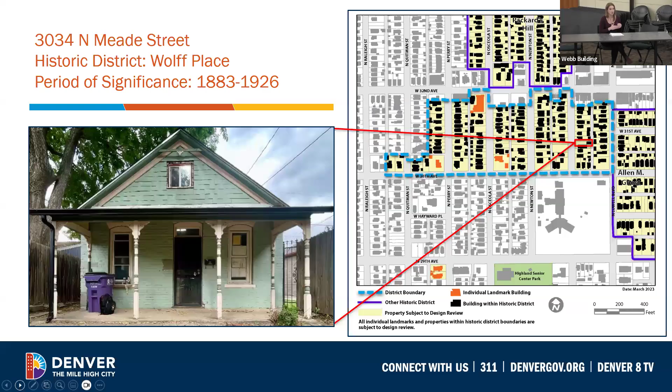That's also why we do have this violation. Typically, we review violation cases at the end of the agenda, but we've moved this up because we have to approve the phase 1 right after we've reviewed this remedial plan for the application. Next slide.

So as I said, this is located in the Wolff Place Historic District. It was added to the neglected and derelict building list in 2021. The building is a Queen Anne style alley house constructed in 1895.

As a reminder, it did go through the RNO. This application didn't go through the RNO review process, but the phase 1 mass form and context did. RNO review is not required for remedial plans, but I'll get into the RNO review once we hit phase 1 mass form and context.

So in 2019, the property owner did request permission to demolish the structure. The commission denied that request, citing design guidelines 2.55 and section 30-11 of the Denver Revised Municipal Code. The applicant has changed their proposal to restoring the existing alley house on the lot.

They are proposing to demolish a portion of this building, the non-historic additions, and converting that and adding a new addition that would convert it into a garage structure. So staff is recommending conditional approval of this application, and I'll spend the next few slides going over the application review.

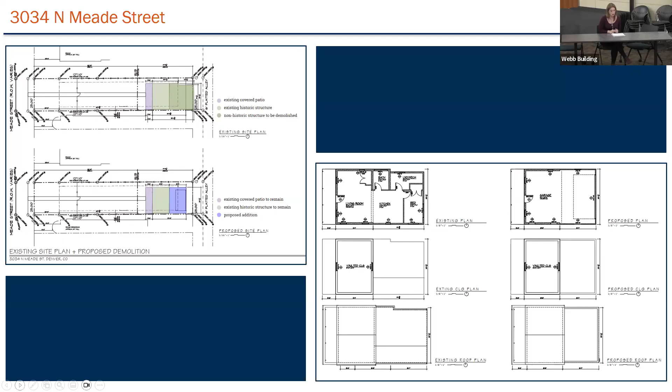So the applicant proposes to demolish non-historic rear additions, and they want to build a new addition in their place. The non-historic addition measures 19 feet 1 3/8 inch by 20 feet 1 1/4 inch, and will be 13 feet in height. The new addition measures 13 feet 7 inches by 20 feet 1 1/4, and will be 9 feet in height.

Early Sanborn fire insurance maps do show that the building originally had a 1-story frame wing at the rear. However, current photos indicate the wing has been heavily altered or possibly replaced outside of the period of significance. A 1-story brick addition was later added to the north side, and the existing rear wing appears to have been altered and replaced, as suggested by the presence of asbestos siding over fiberboard sheeting and the wide window proportions. Landmark staff estimate these changes occurred between the 1940s and 1960s.

Due to the extent of the alterations and the current condition of the wing at the back of the building, Landmark staff would consider this wing as non-contributing and support its demolition.

So the applicant plans to construct a new one-story flat roof addition in its place. The addition footprint will measure 13 feet 7 inches by 20 feet 1 1/4 and will be 9 feet in height, as I mentioned before. It will have an EPDM roof with smooth finish fiber cement board and batten siding. The windows will be 1/1 aluminum clad windows, and the garage door will be a steel flush panel door. They're also adding a 200 amp electrical panel that will be added to the east elevation.

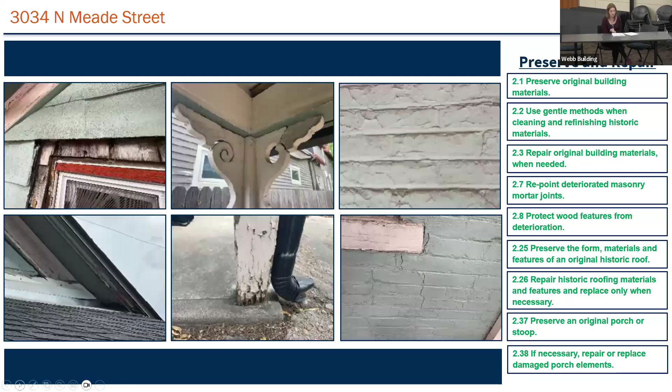So now I'm going to go over what guidelines are being met or not met for this application. The remedial plan proposes to preserve and repair historic building materials using preservation best practices outlined in the guidelines and in the National Park Service's preservation briefs. We're citing guidelines 2.1 through 2.3, 2.7, 2.8, 2.25, 2.26, 2.37, and 2.38.

The remedial plan also proposes to replace damaged materials with historically appropriate materials, guideline 2.23, and replace non-historic materials with compatible materials, guideline 2.20.

Moving on to the proposed addition, the new addition is subordinate in size, guidelines 3.1 and 3.9. It respects historic features, guidelines 3.3 and 3.5. It is recognizable as a new addition, guideline 3.4, and is compatible with the historic structure and surrounding construction context, guidelines 3.6, 3.7, 3.8, and 3.10.

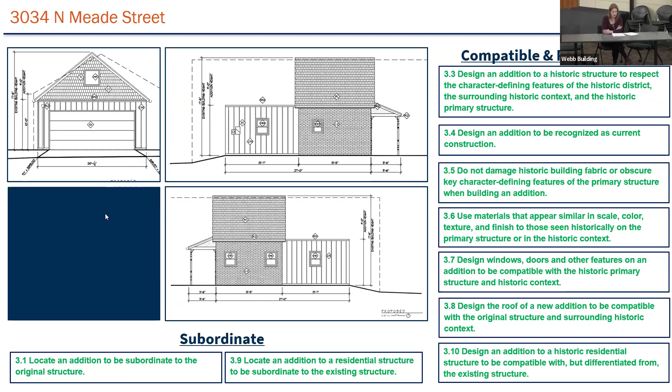So with that, staff is recommending conditional approval of the remedial plan and the addition with the condition that the primary structure be approved and permitted prior to conversion of the alley house into a garage. As I said previously, they cannot convert this into a secondary use without a primary structure on the lot for zoning.

Great, thank you, Jesse. Commissioners, do you have any questions for staff?

I had one question regarding the shingle siding on the gable ends. Is that asphalt or wood? And is that part of any of this work dealing with that?

If you will go back to the page with close-up photos of the windows, Brittany. So you can see on the upper right-hand corner, there is an asphalt shingle over top. The non-historic windows that were put in, they peeled back more of that asphalt shingle siding, and you can see that there's wood shingles intact, straight edge wood shingles intact underneath.

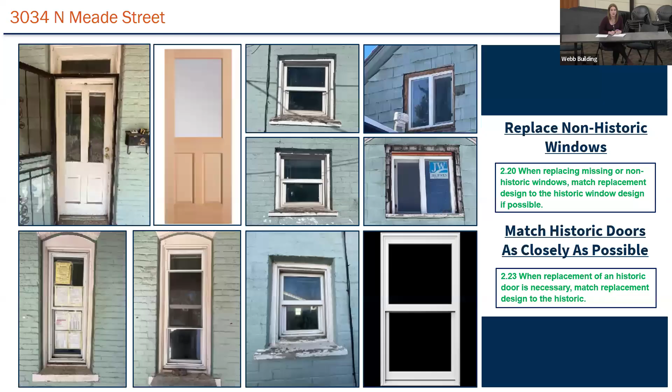Those are likely historic to the building. We are not sure what the condition is. So in the remedial plan, I believe on the materials page and elsewhere, it does state that they will do some exploratory work to see what that condition is. If it's restorable, they will restore it. If it is beyond repair, they will replace it with wood cedar shingle to match. All right, thank you.

Any other questions for staff?

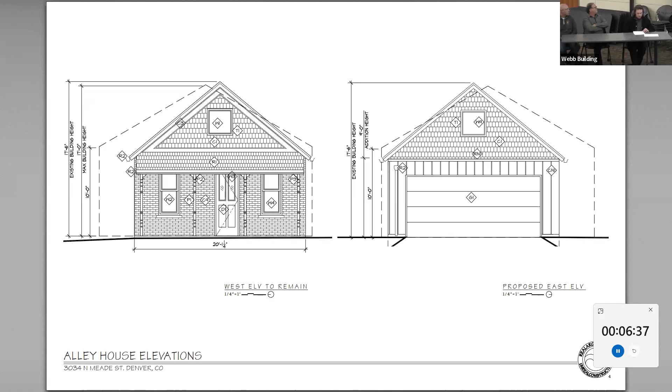I'll jump into it a bit to give an overview, but this is for some of the context. Looking at our rigorous study of the nested gable Queen Anne style homes in and around the Wolff Place Historic District, the hand-drawn studies we looked at for facade proportions, gable ratios, window grouping, shapes and sizes, as well as covered entry forms. This ensured that the design is grounded in the specific architectural language of the district and not generalized Victorian motifs.

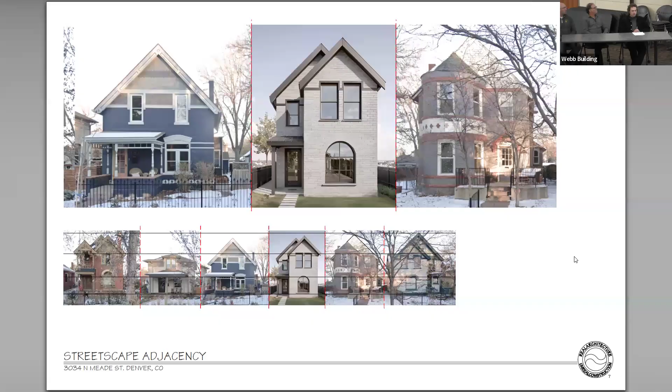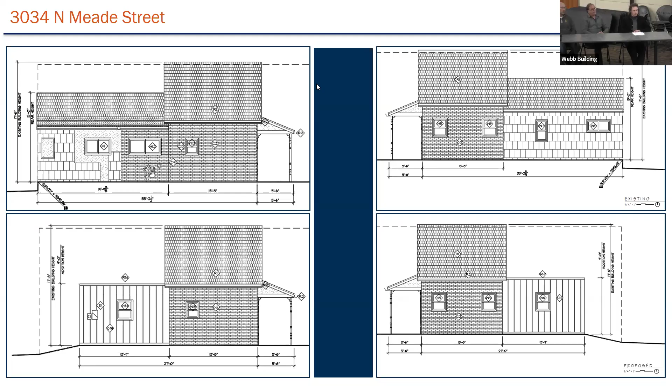Okay, great. Thank you. Commissioners, did you have any questions for the applicant at this time about the remedial plan? Just wondering, what's the strategy if you're cutting out or removing the back portion that's non-contributing, supporting the gable above that? Right now there's no back wall there. Yeah, so it's being supported by a beam that is essentially between the new and the old. We'll have to see what that is and stabilize that for sure, but there's no, it's wide open front to back right now.

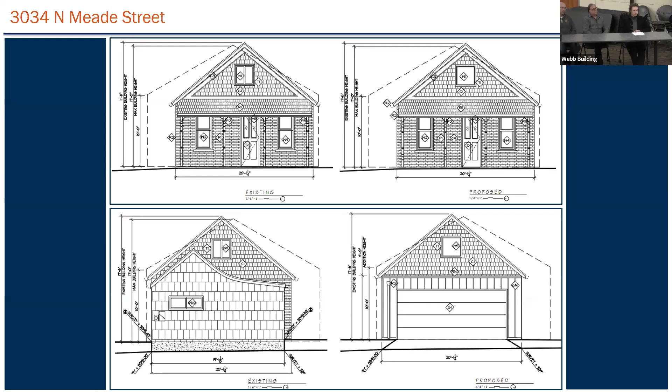My question or concern was, I guess, both. I understand the process for restoring the brick and mortar as you guys have explained, but the brick from the photos looks in pretty bad shape, full of cracks and everything. So are you guys, let's say we start to peel that paint away and we understand the brick is rather deteriorated, is there kind of a backup plan? Because I think not only for the brick, but also for the wood siding on the front facade, I have a feeling it's going to be very deteriorated as well since it's been entrapped behind that other asphalt shingle for quite some time.

Sure. Right now the brick is all painted and we don't intend to remove the painted sand brick, so we intend to repair it as needed and repaint the facade. Have you tried to remove any of it already, just to see what you're working with? No, we haven't, but the interior is unpainted so we can see what it is on the inside. It's definitely lime mortar and sand brick, so it's not face hard brick. We've tried over the years to remove paint, using a couple different methods over the years. I don't know that we intend to do that on this small of a building.

Okay, thank you. Any other questions? All right, thank you very much. Jesse, did you have any clarifications or further comments that you'd like to make before we deliberate? All right, you're welcome to go back and we'll bring you back on. All right, commissioners, what are your thoughts on this remedial plan?

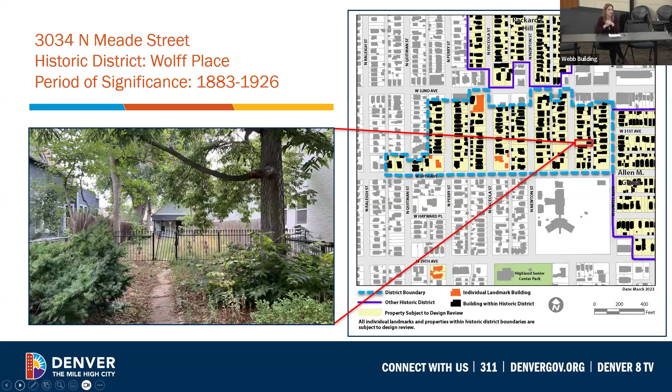So just quickly, I'll go over the site information again. This is a contributing building - the alley house that's existing on the lot is a contributing Queen Anne style building to the Wolff Place Historic District. It was built in 1895. The applicant is proposing to restore that alley house and construct a new tandem house structure in front of it.

The commission in this portion will be reviewing phase 1 mass, form, and context for that tandem house. This project was referred to the RNO on September 1st, 2025, and the RNO is recommending denial of the request. A copy of the RNO comments were included in the application materials for the commission's review.

Just to put in a clarifying note here - while the RNO did talk about the remedial plan for the historic building on the site, referencing guidelines from chapter 2 as well as chapter 4, the RNO's review and purview is only limited to the new structure on the site. We do not refer remedial plans or violation cases for RNO review. Just wanted to make that clear.

Staff is recommending approval of this request, and we'll spend the next few slides going over our findings. Just going over the project scope briefly here - these are the proposed site plans and floor plans.

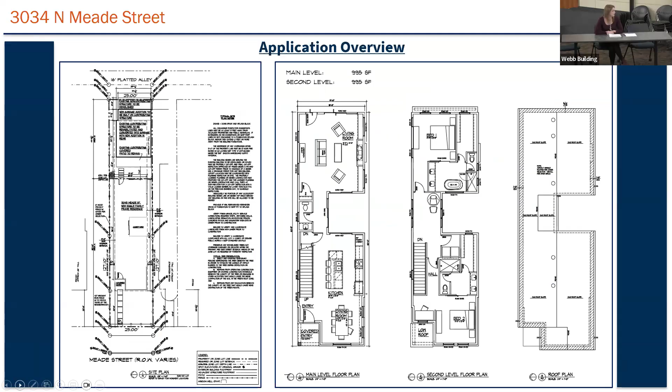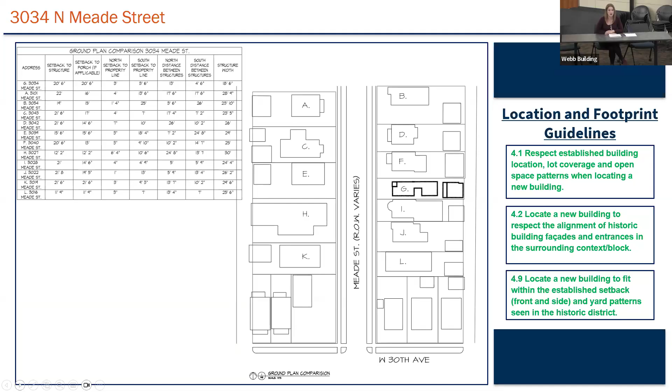The primary structure will have a footprint of 62 feet 3 inches by 19 feet, and an overall height of 29 feet 6 inches, which is consistent with the range of building footprints and heights found within the district and immediate block context. The structure will be set back 20 feet 6 inches from the street, again aligning with the surrounding setback patterns found on this block.

The building features a simple nested gable form with tall, narrow proportions. Its overall massing and form draw inspiration from Queen Anne style buildings found in this historic context and in the immediate block context.

Landmark staff has noted that the building has a very traditional style and appearance for a new structure, and we do encourage the applicant to address the matchiness in phase 2, potentially through the use of modern materials to help delineate it as a new infill structure.

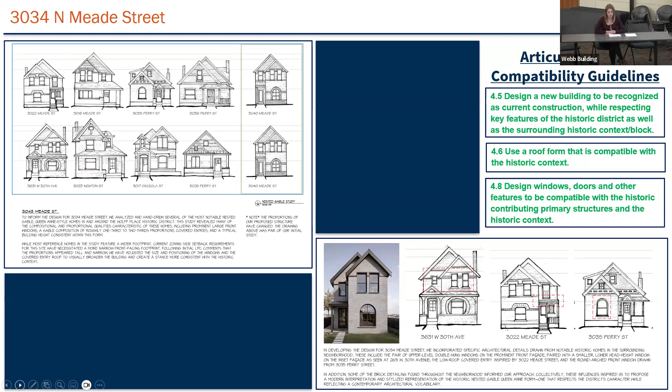The proposed roof form is simple, and the design incorporates tall and narrow windows with arrangements and rhythms similar to those found in historic buildings in the Wolff Place Historic District. The primary entrance is located beneath the front porch and is oriented towards the street.

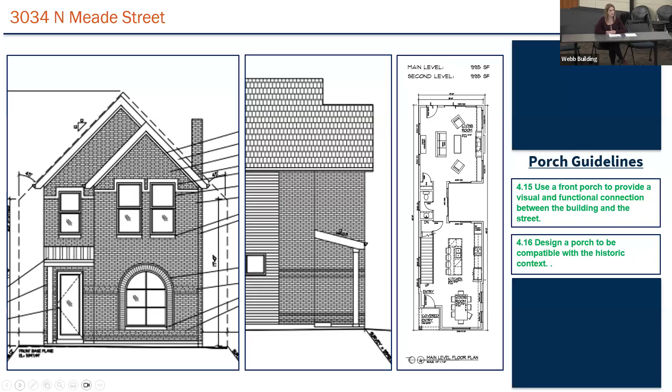The building also includes a quarter width shed roof porch with a footprint of 6 feet by 6 feet. The porch form and placement, as well as its scale, are consistent with the surrounding historic properties in the block context as well as in the historic district.

So staff is recommending approval of phase 1 mass, form, and context, citing guidelines 4.1 through 4.6, 4.8, 4.9, 4.15, and 4.16. Thank you, Jesse.

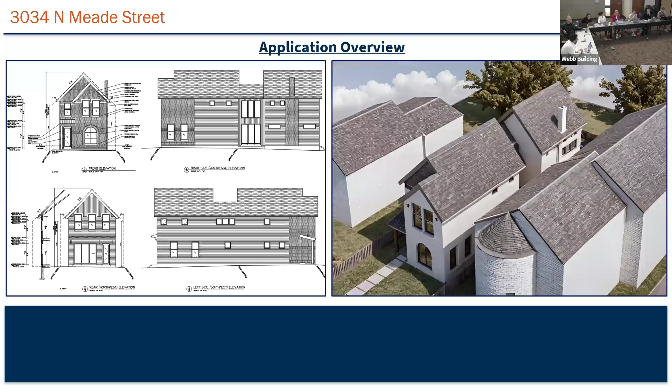Any other questions? So you had mentioned that this being phase 1 we're mainly looking at form and massing, but you had made a comment about Landmark feeling there was opportunity for it to be less matchy - by that you mean the materiality? Yes, correct, and that would be reviewed during phase 2.

Any other questions? All right, I think we're ready to hear from the applicants again. You don't need to reintroduce yourself, but you're welcome to come up and we'll get your presentation loaded and let you know when we're ready.

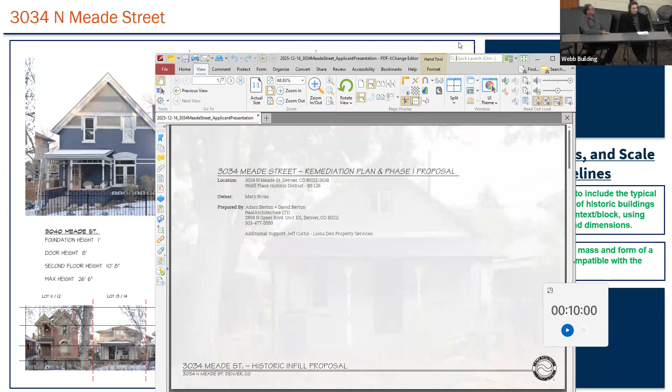To jump right into it, I wanted to give you an overview of the design process we went through, taking our clients' needs and matching them with the formal concerns of the historic district. Coming up with a pretty traditional form will address the concerns of making it look more contemporary in phase 2, using specific materials including some metals on the covered entry roof portion, as well as some lighter brick elements.

The other main constraint in coming up with a form that fits into this streetscape context was the large side setbacks we have to address with current zoning, which ends up leaving us with a very narrow footprint.

Going back and forth with Jesse and the board, we came up with a few design motifs, including brick banding and window proportions, to give it a larger, wider stature on the site and not feel too tall and narrow.

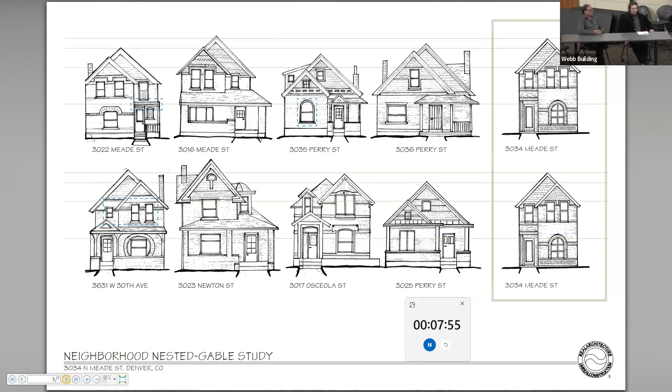We did this block study and looked at all the different designs existing in the Wolff Place Historic District that are similar in shape and scale to what we're presenting today. You could probably flip a couple slides. I think we've seen most. Maybe one more.

Just to get a sense of the streetscape, I know we saw this continuing some variety through the block. This particular form isn't mimicking any forms on this streetscape, so I think it provides a nice variety while still addressing that historic context on Meade Street particularly.

That's it. Just wanted to say thank you again to Jesse and the team for all the collaboration throughout this process. It was definitely eye-opening to me to see all that you guys do to ensure that these historic districts remain true to their character. So thank you.

Commissioners, do you have any questions for the applicants about the infill project?

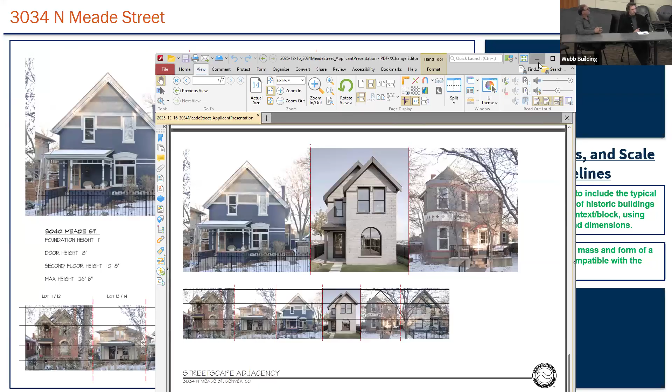Just wanted to clarify something about the RNO letter. Reading through this, it seems they didn't necessarily have the full information about the garage, and that was kind of their main concern for not recommending approval. Is that the case, that it was just misdeveloped information, or...?

That's a good question, Jesse. This went to them, but the garage didn't go to them, is that right? Oh yeah, they just didn't review it at all. The RNO's purview is only for new construction, top additions, and ADUs. The remedial plan for the existing structure on the site, which we converted into a garage, is not included as part of that - it's its own separate application.

Okay, and did you guys meet with the RNO at all? We didn't. This was submitted to them, and we received an email really late after the submission. The other thing regarding the process was that we completed phase 1 of the primary structure - Real Architecture completed that before we jumped on the remediation plan, so that's why there was a bit of discrepancy there, but we've now taken that into our whole scope of work. Thank you.

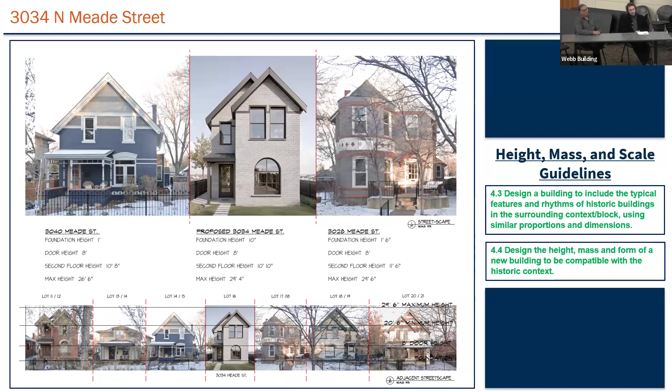Any other questions? All right, thank you very much for your time.

Jesse, any follow-up? Yeah, I just wanted to make it clear again, the RNO was very detailed in their letter about the existing historic structure on the lot. That's not within their purview to review, though they did provide comment on it. I'd say there are many alley houses in our historic districts, and this is not the first time we've reviewed the addition of a tandem structure in front of a historic alley house. In the past, it's something we do allow.

The applicants are proposing through that remedial plan to restore the existing historic structure on the lot as a contributing structure, and would have to come before you all if it were proposed for demolition. It already came before the commission in the past and was denied for demolition. So staff has made it very clear to the owner that demolition of the historic structure is not a possibility, but we would consider a review of the new tandem house primary structure on the lot.

Thank you, Jesse. All right, what did everyone think?

I'll jump in since I just wanted to understand if the RNO had specific objections to the placement of this new structure blocking the view of the historic structure. Going through it again, it seems like that's not necessarily their concern.

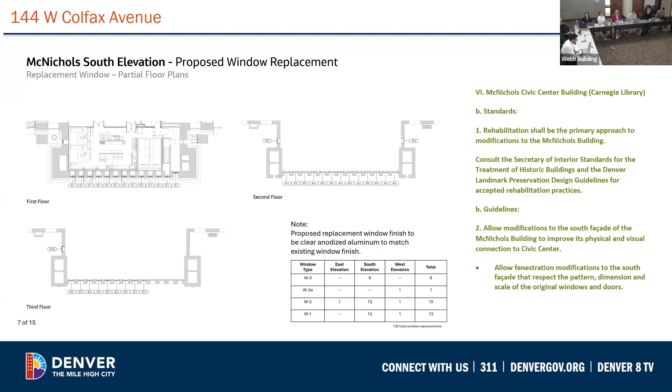So here is that elevation of the south facade. That door in question that will be converted back into a window is this door right here. So again, this was originally a window. It will go back to a window. That will be the only change to proportions, but that is encouraged by our design guidelines.

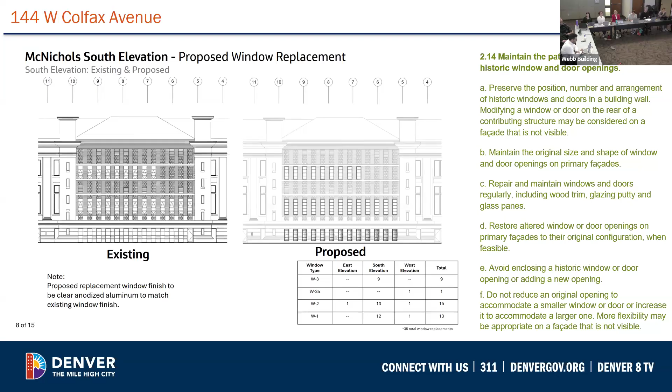So it is in compliance with guideline 2.14, which encourages maintaining the pattern and proportion of historic windows and doors, again in alignment with the 1950s/56 patterns and proportions, because there will be no changes to that infill that was made in the 50s.

As I already mentioned, there are 4 distinct window sizes and types. The applicant has meticulously documented those types: window type 1, window type 2, and then window type 3, with a subtype 3A. I'm just calling them 4 types because they're 4 types, but it's a subtype of A. The applicant has meticulously documented those types, as you can see here on the screen, and then they will be matched in proportion.

Really, the only change is that the current windows are operable. They will be non-operable with this replacement. That is not a major concern, as the mullion and muntin patterns will be matched.

Windows will be inset into the wall plane from the exterior. The inset will look similar. I will let the applicant talk about how from the interior that will be slightly different, but as we only have purview from the exterior it will look very similar. So that is in compliance with guideline 2.6 and 2.9.

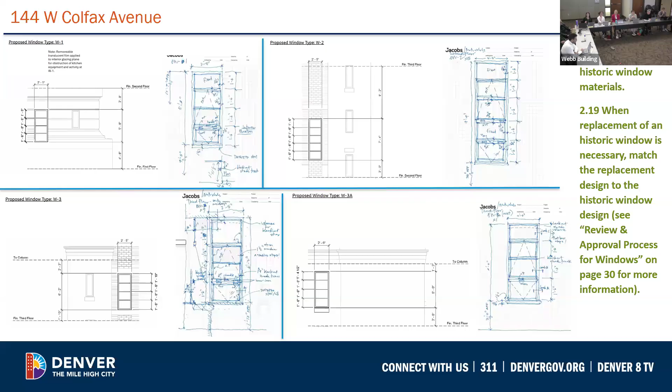The current windows are in anodized aluminum, and they will be replaced to match. Again, these windows are 70-year-old aluminum windows, so they have reached their lifespan. They are ready to be replaced.

Therefore, we are recommending approval as we feel that this is a significant elevation that does represent change to the use of the McNichols building that is potentially historic in its own right. As we are not proposing to go back to the original 1909 appearance of the south elevation, we feel it's important to respect this 1950s alteration, and thus are recommending approval of the replacement of these 38 windows on the south elevation with new aluminum windows to match the existing.

Great, thank you, Brittany. Commissioners, do you have any questions for staff before we hear from them?

General question, do we have photos of what this looked like prior to the restoration? You read my mind. We do have some photos, I can send them to you. Great, just pure curiosity. Thank you so much, I will send them to you after this meeting.

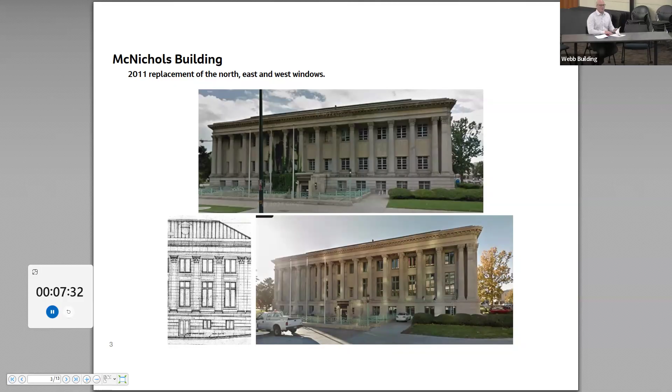This gets into our project scope. The top picture is from the 1950s. It's not very clear, but it does show the openings that were used, and it's pulled back far enough that you can't really tell if the louvers and infills had occurred at that point, or if it's still from the original library. To give a sense of context, the existing conditions are in the bottom photos, which show all of the windows, and also the areas that have been infilled, which have included louvers as well.

As mentioned, the use of the interior space has dictated a lot of what happened with the windows, and I wanted to point out the mechanical code as well, dictating natural ventilation, which has progressed obviously from the 1950s. This is one reason we're not proposing any additional openings, and we're also understanding that the operability of the windows is okay to remove due to all of the mechanical necessities.

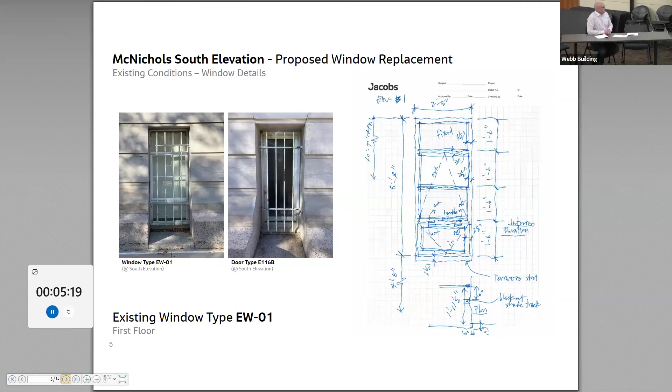We went through fairly quickly and documented all 4 of the window types that Brittany mentioned as well.

One component we are going to maintain is the window box, essentially a feature of the windows, making sure the new windows are placed in the same horizontal orientation. So the depth of the sill on the exterior will be maintained, where on the inside is where we'll make up any room that could occur from the difference of frame style we're going to use.

We have been working with the manufacturer, Manco Windows. They do a lot of historical window replacement. Their frame is about 2 to 3 inches thick, so that will be taken up on the interior. We have plenty of room, and the areas on the interior don't use the windows much, it's assembly spaces, so there's a lot of room to work with on the inside. That's where we plan to take up any space, thus maintaining all the aesthetics of the existing conditions.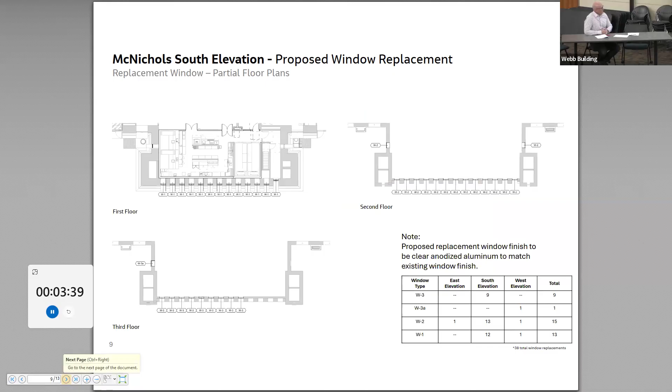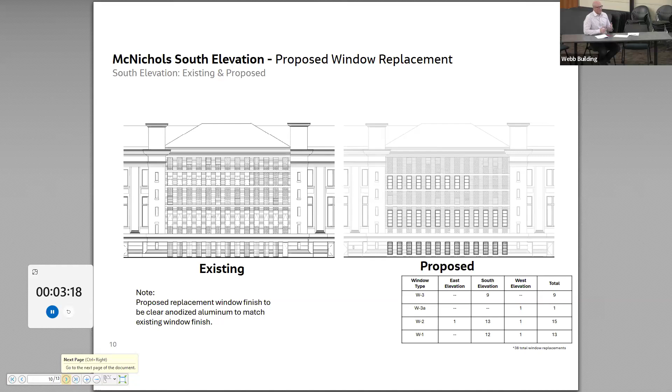The existing elevation against the proposed elevation. Again, everything is intended to be like for like, including the materials, which is clear anodized aluminum. The only thing that would be changing is the operability.

East and west elevations. That's it.

Great, thank you. Commissioners, do you have any questions for the applicant? Yeah, did you guys do any openings in the existing windows? Do you know what the rough opening conditions are?

It's a limestone granite building, so the sill is a granite sill. We're fairly confident that when we pull the window out, we're going to have a similar condition or a good firm condition to install. The jambs, we don't know what that is. We're assuming it's some stone material as well.

So is it a storefront frame? No, this would be closer to like a residential frame. So how do you secure the frame into the adjacent masonry, I guess is what I'm asking. There would be some masonry anchors that would go through the frame.

Through a subframe or through the frame of the window? I don't know, based on the model that we're proposing, I don't know exactly how that installation occurs.

Have you guys considered any flashing or sill pans or anything like that? Yeah, we would want to see what the conditions are when we pull the window out, but then put in appropriate flashing to make sure it's weather tight. Thanks.

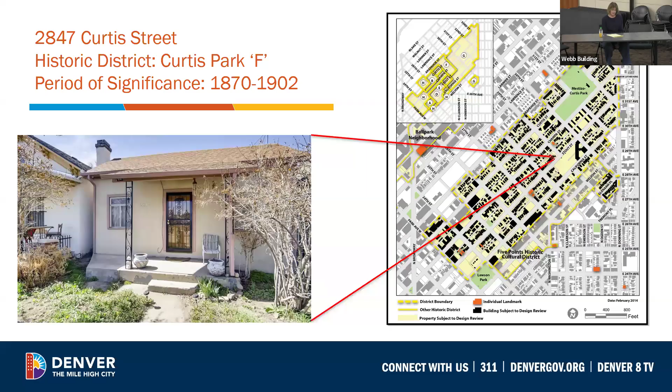So this particular home here, this image is from 2020, is in the Curtis Park F district, and it was built in 1887. Next slide, please.

This home was reviewed starting around 2020 by previous Landmark Commission members, probably none of you. And a previous homeowner came before the commission with some plans to remodel the home. The commission at that time approved an addition and an ADU. That project was never built.

The property sold, and the current owners then prepared a revised plan that was very similar, a little bit scaled back, no ADU, that staff approved. In 2023-24, Crystal Marquez was the staff planner on that.

And the project really tried to bring the home closer to its original appearance. You saw in that 2020 photo that the home was stucco, windows had been replaced, and the approved project used images like this 1976 photo from Denver Public Library to try to bring the home back from a rather altered appearance. So on the right, you see the approved elevation.

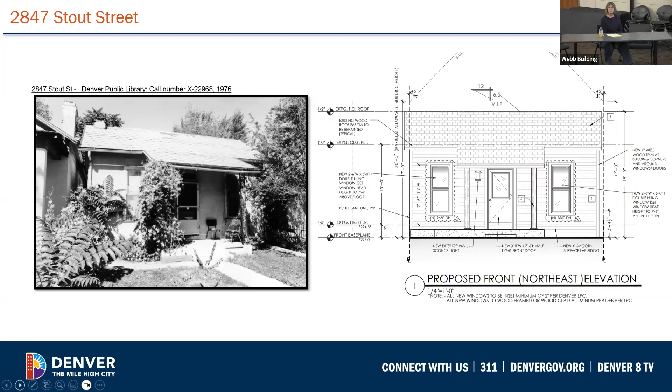A permit was issued early in 2025, and the construction began. Next image, please. In May of this year, Crystal received a call from Sustainable Design Build, the contractor.

She was asked to come to the site because they had concerns about the stability of the structure. So Crystal did go to the site. We talked about some concerns, certainly didn't want her to be in any compromised position there.

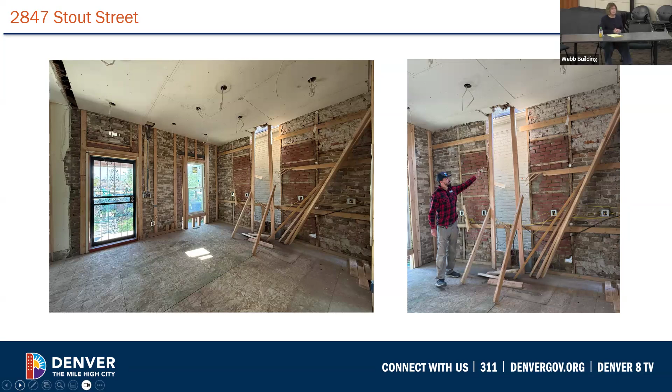Next slide, please. Unfortunately, what occurred next was that our landmark inspector, who's no longer with the team, happened to go by the site a few weeks later, and the original walls of the building were not there anymore. New walls had been framed and they were holding the historic roof in place, which was not something that we wanted to see, and we had not been contacted, just discovered this.

We're disappointed that we weren't contacted at this point. I'm going to go on to talk about why this occurred, and we do understand that there are reasons why the walls collapsed, and there are some very unique circumstances here, but we are disappointed we weren't contacted.

We've talked to you before about a lot of concerns we have with violations in the field. We want to improve our communications with contractors. Jesse White and I have had a lot of discussions about our future hopes for contractor training programs and different ways we want to improve communication.

We need to be called. Crystal was on the site. She talked to the contractors and said, please let us know. Here's what we'd like you to do.

So we have, unfortunately, through the layoffs that occurred with the city of Denver, lost our landmark dedicated inspector, which is a step backwards in executing those things I've just described.

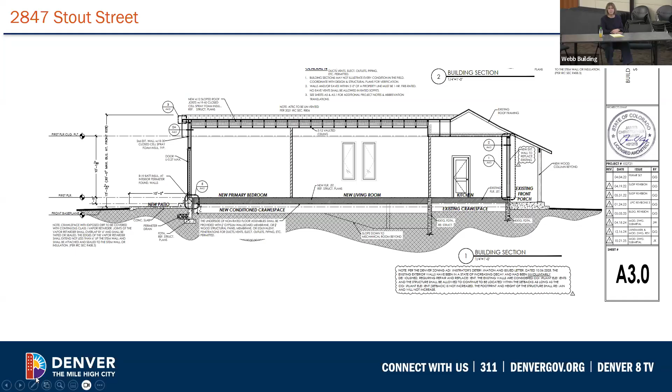Otherwise, it would be a loss that we, as staff, don't want to see happen. So, complicated discussion. We regret that this all happened, but we understand why it happened. Certainly in talking to the contractor, I think they feel a lot of regret. I think Zach will speak for himself. He wanted to be here today and for personal reasons could not. But we've had a lot of hindsight discussions about why this happened. Our recommendation is that you approve the reconstruction of the walls.

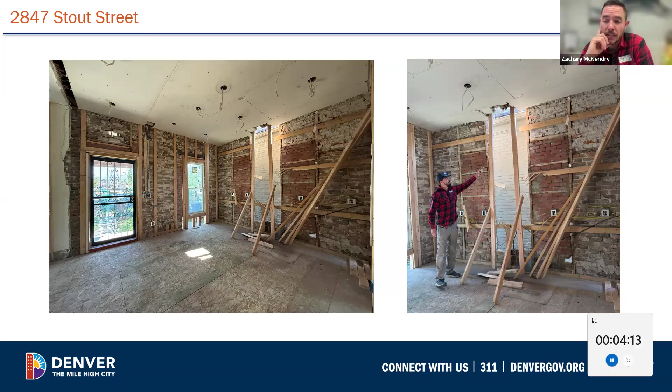To speak to the specific question about the masonry: from the exterior photos, I would think if they put that masonry condition in with the cladding already installed on the exterior, you'd see that mortar pancake out against the cladding. I don't see anything like it. It was actually very clean. While it's not a fully finished exterior like you'd see in a single wythe brick wall, it does look like it was completed before any exterior element was established.

It was just built in place like this, and then they finished the outside. That asbestos parge coating did come off without taking a lot of the mortar with it and damaging the bricks. So I don't know what the in-between condition was from the original construction to that stucco condition.

A hard lesson for us as a builder about how to navigate what feels like conflicting interests between the landmark board and maintaining historical sites, and the Denver building department's mandate for mitigating asbestos. Hopefully I never encounter a condition like this again, but in the future we'll be much more careful and do more discovery work to make certain we aren't entering a condition we're not aware of underneath the asbestos, with that asbestos plaster really holding those walls together in that historic structure.

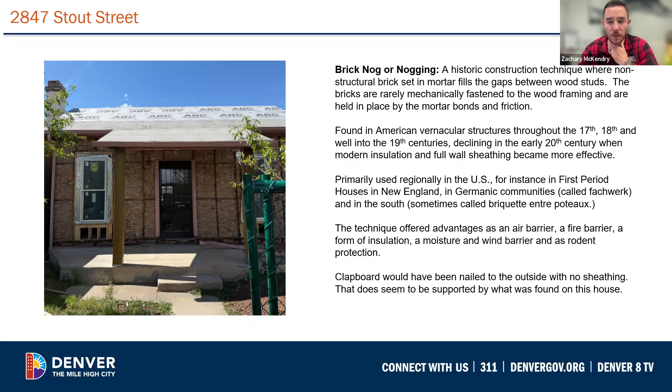Just for clarification, the drawings in your packet are just select sheets that will be swapped into the full plan set.

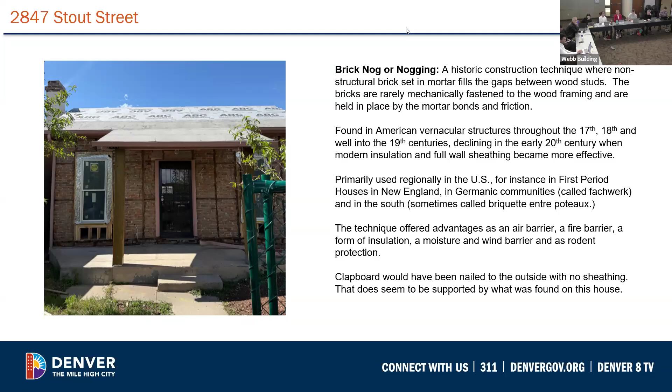Any other questions for the applicant? Thank you very much for your time and explanation of this. Amy, any other further recap?

Okay, all right commissioners, we move into deliberation on this. Everyone's thoughts? I'll say I've heard of this construction method, but I had never seen examples of it, and very astonishing. Too bad that it was lost.

I just Googled it, and there's a whole lot of what you think of when you think of like Elizabethan England. That's what this is. There's a lot of buildings not here.

Yeah, that's what's kind of surprising about it, is that I've heard of it in the context of timber frame, where the wood members are big enough to be able to support themselves should the nogging kind of lose its integrity. But yeah, this didn't seem like it quite did.

It's a little bit of a basket weave of both. Yeah, and it looks like the wood would have diagonals and it would be more of a herringbone.

I think some European built this for himself. It wasn't, and it was more of a home build, it looks like.

Do you think that third element - we have the brick infill, the wood, and then the diaphragm of whatever the cladding or interior plaster is - is what keeps it structurally sound? And I think once that was gone, it was pretty much a lost hope.

There was nothing holding here, it just fell out. Yeah, I've seen it in New Orleans, but it was made with structural cypress, which is a very different condition.